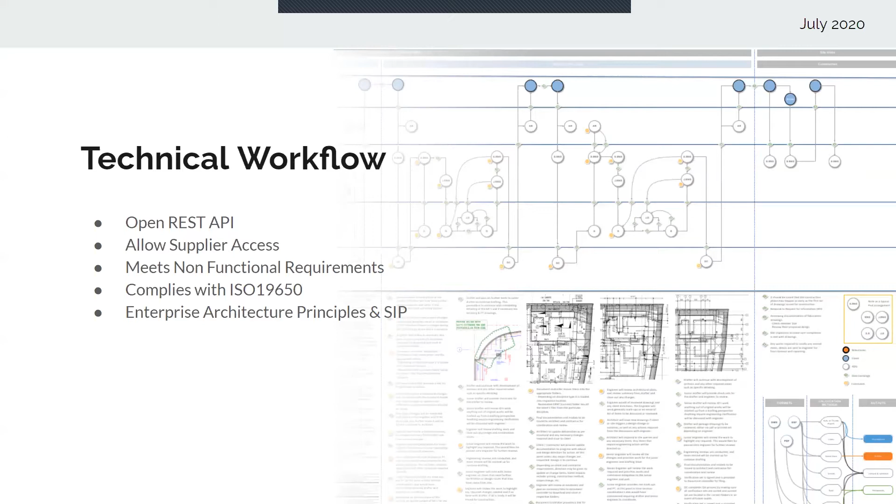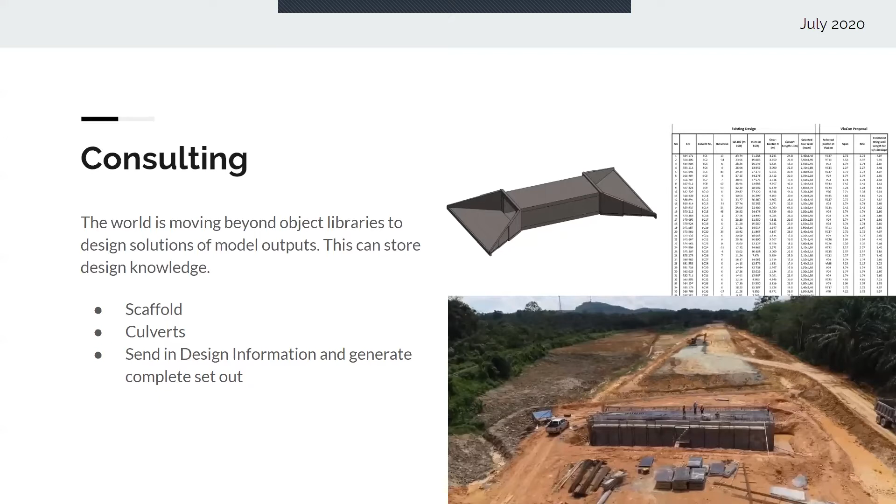The other one is, like I said, consulting work that we do, and this one was for the company YTL - basically a dual track electric train system from Johor all the way to Gemas. The track itself, as you see, is almost 200 kilometers with 11 stations, so that's our involvement in that project. What we've done specifically is help generate some digital assets - they manage a lot of the production of the culverts. I'm sure a lot of you have seen models dealt with in 3D, and there's always this perception that in the model it looks small, but in reality that's how big some of the culvert sizes are. And I'm sure in Vietnam, being a tropical location, you get the monsoon seasons where there's a lot of rain, a lot of weather, and so forth - so that's some of the work we've done.

Further to this is, how do we explore data from a city's perspective?

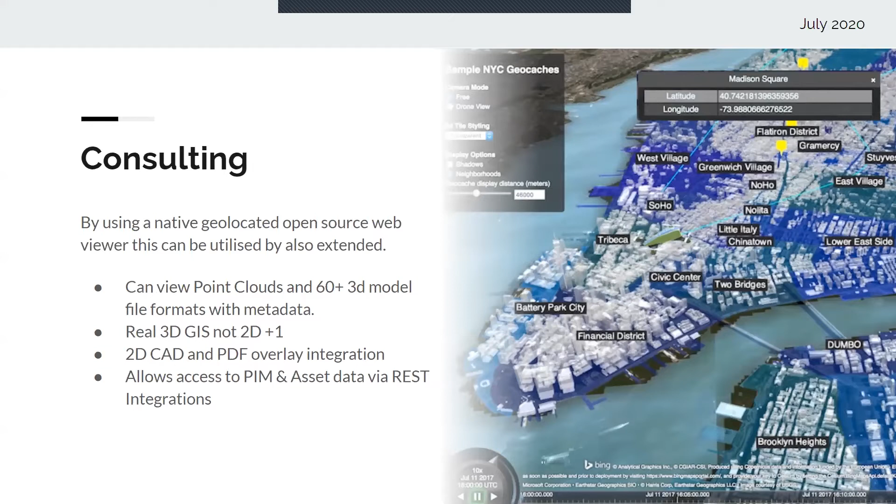We've seen a lot of interest lately on how state and local authorities within Australia are going to be able to better manage assets around the city. So we've been able to work in these spaces, helping with GIS information, civil CAD information, as well as BIM deliverables. There's a variety of information that gets incumbent into a department, similar to Vietnam, where various departments would need someone to manage these assets. We've helped explore those types of solutions.

The other part of the tools we develop is around data compliance. The good thing about Vietnam, and what the Ministry of Construction is doing now, is you're setting these policies at the moment, or may have already. You're asking for all these data requirements, but what I'd recommend is, if you're asking for digital information as a deliverable, think about what automation can be built into this. So if you're asking for classification, you can build audit tools that check a model and make sure these classifications have been entered into the necessary elements.

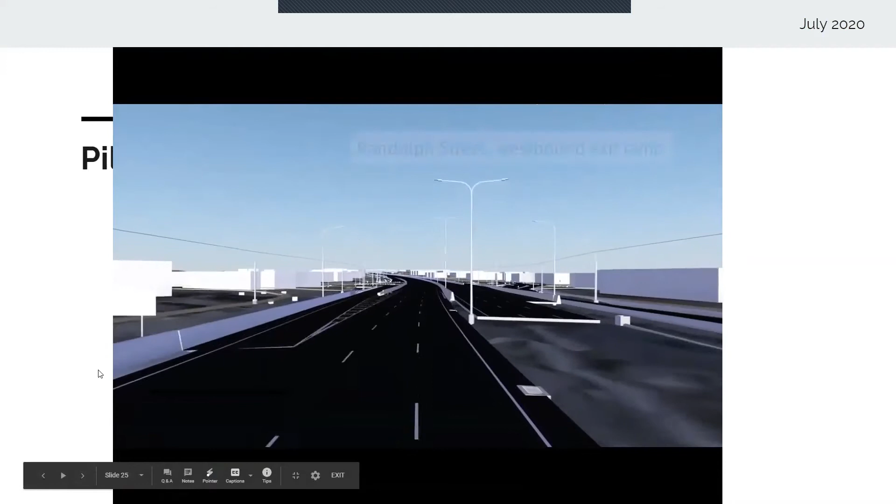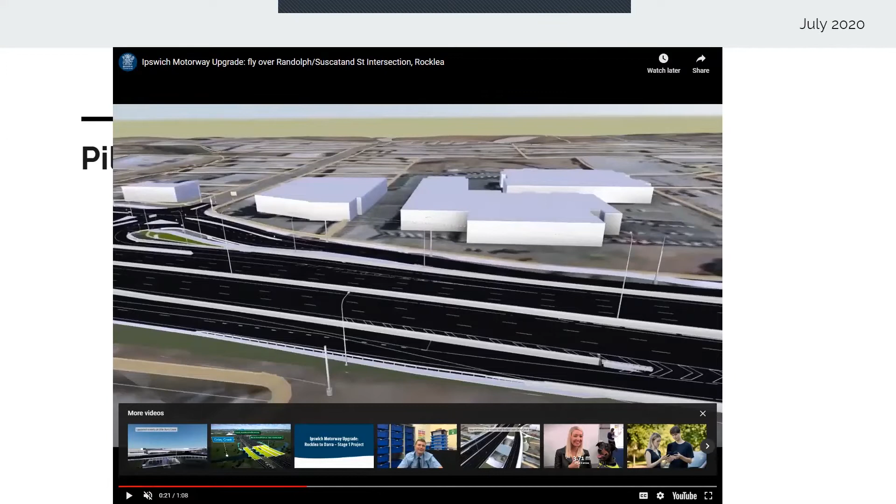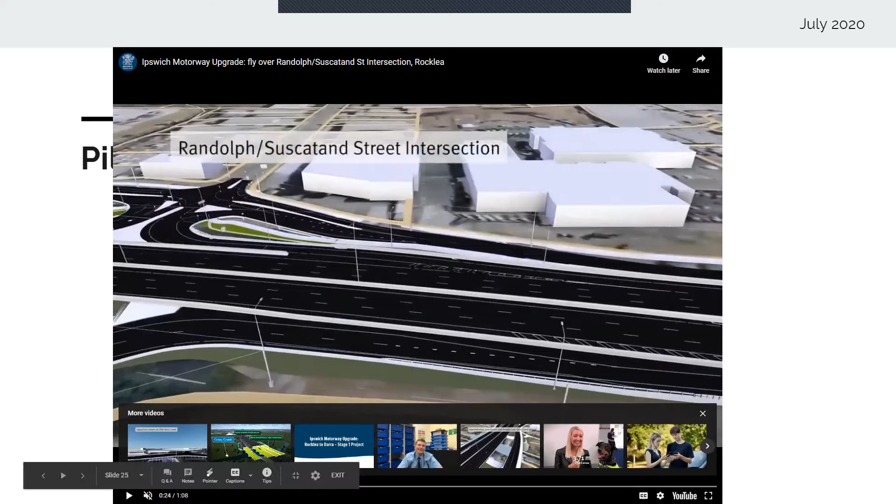So this is one of the case studies, project case studies here in Queensland. Department of Transport and Main Roads is effectively a department that manages all the roads, footpaths, and I guess all the accessible assets within Queensland. So if you remember looking at the map before, it's a pretty big land and zone. So even though we can see it's a nice, pretty model, essentially this project itself, as we walk through and look through it in detail, there's obviously a lot of existing facilities. This was an existing highway, and obviously upgrading an existing road takes a lot of planning.

So one of the goals that they did achieve with this was by having just a simple model, I suppose—and I wouldn't say simple, sorry—a model with enough attributes.

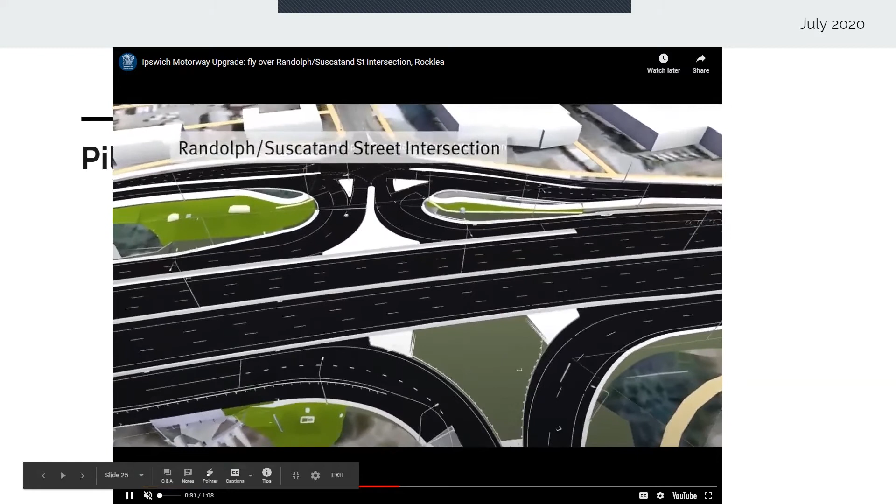You know, for instance, this is a barrier, that's a lighting pole, this is the road. Simple items like that, they're able to better plan how they're going to construct this, the staging, and really sit down with other stakeholders. So you imagine if we were going to construct this, how are we going to communicate to the businesses and say, well, hey, we're going to be building this for the next 2-3 years, or even more.

We're going to have this type of impact to your business, and have community consultation. So within Australia, I suppose in a lot of our projects, there is a lot of community feedback. If it's a state project, there is local authority feedback and so forth. If it's federal, there's state feedback and local feedback. So there's always definitely that collaborative approach to any capital works within Australia.

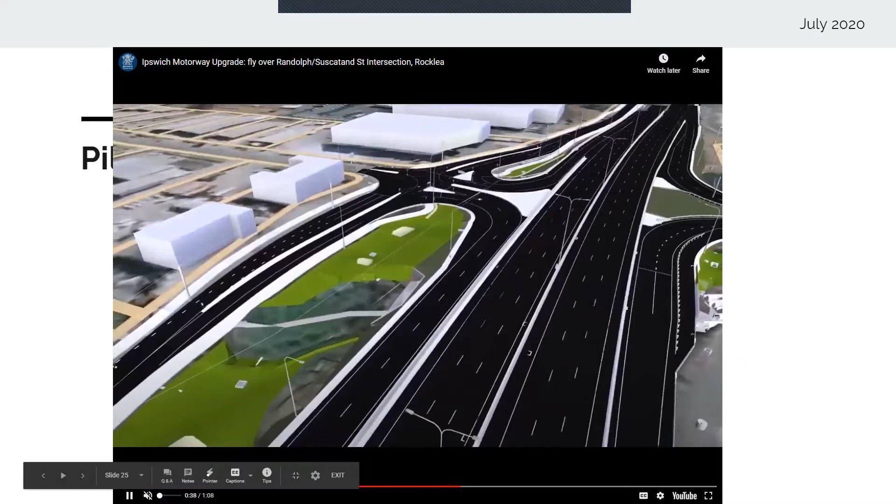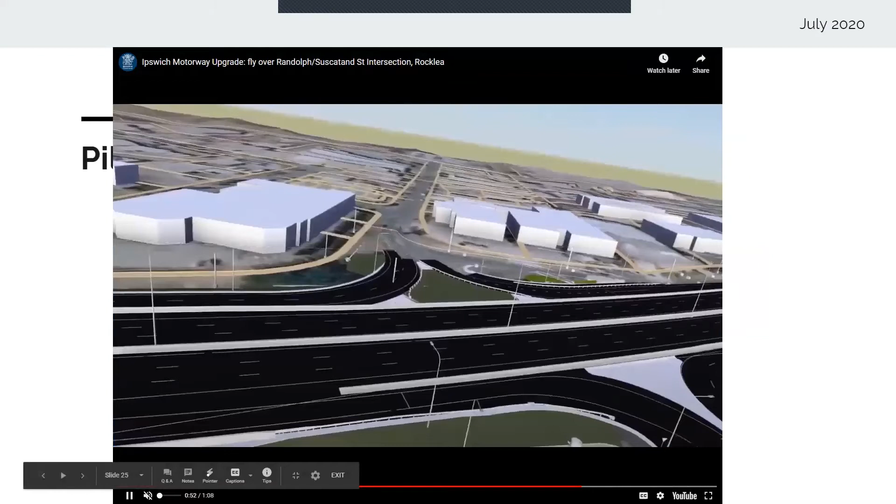And this is where a lot of, I guess, confusion and miscommunication happens on these type of projects when you can't see the full picture or the scale of it in the actual impact itself. So just keep playing that through.

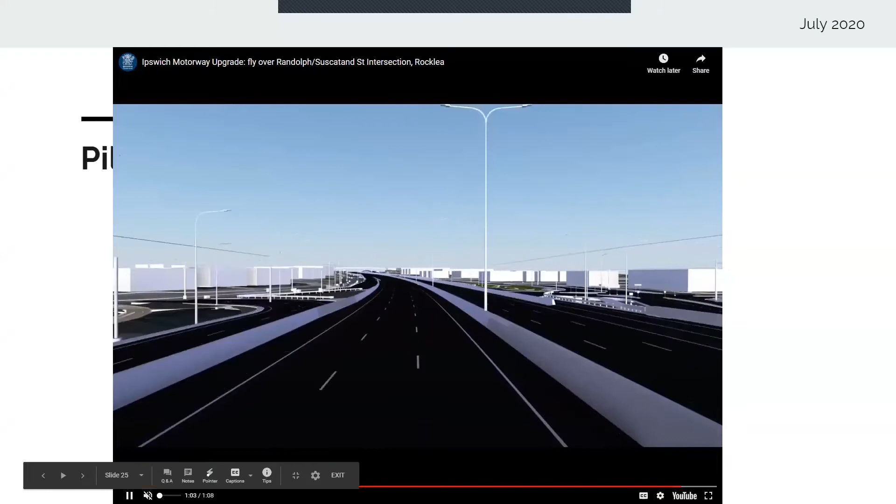The other one is, as part of this approach to BIM, this was deemed as a pilot project. So what that meant was it was one of the first projects that the department was looking at enforcing BIM as a deliverable or a way of delivering the project, but also a way to assess how much have we actually improved versus how much have we wasted in terms of time and effort. So that's what a pilot project is deemed between these departments.

So we saw the pretty picture of the renders, which is great, but ultimately drilling down to the construction and sequencing.

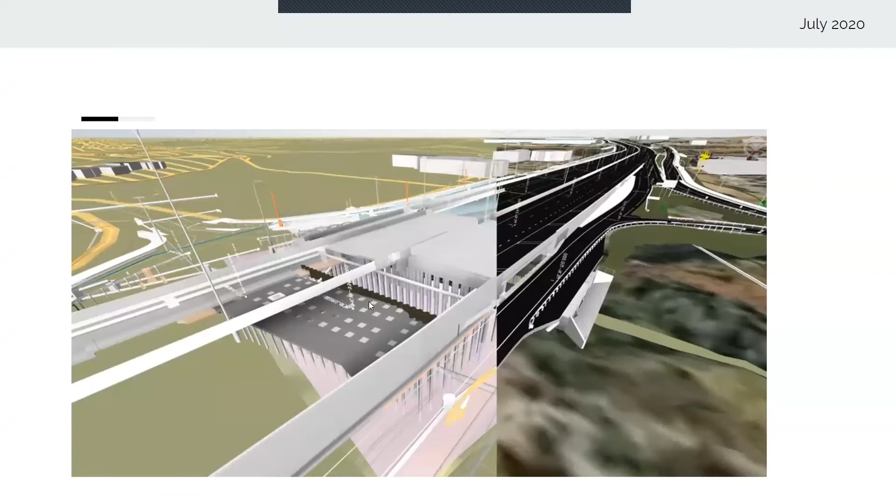In this case, it's very important that civil projects are managed effectively. If they're not, time is money, you know, so we all know time is money. And if there's any miscalculations and missed estimates, or even just purely missed tasks - so if we missed a critical task in the project, that adds time to the overall budget and so forth.

So having a digital representation of what's going to be built helps. And you can imagine if I was sitting here explaining to everyone how I'm going to build this, we can now have consultation, we can have feedback on how that's going to work. So that's one of the definitely outcomes of that particular project.

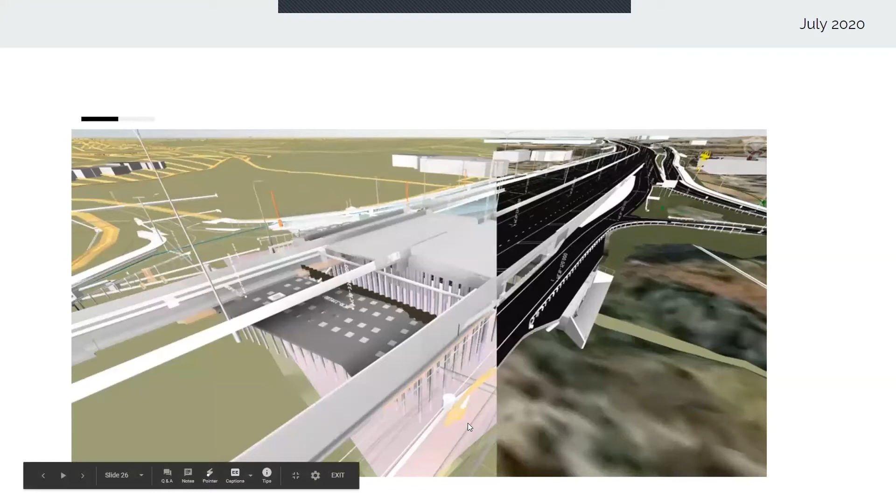So coming back to Queensland, their BIM approach has been very simple. It's not complex. Literally, this is their guideline. They have a 7-page document that talks about their departments internally. This is what we want to do, this is what we want to try to achieve.

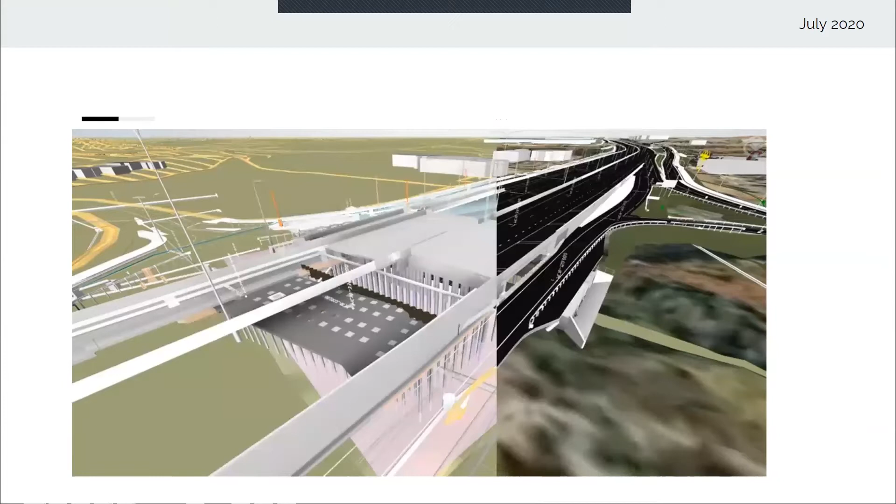Go ahead and look at some opportunities on doing that. So every department has gone down their own path on how to achieve that. So that's one thing I enjoyed about the Queensland approach - it's very simple in its form, but effective as well.

Now, heading towards Victoria now. So this is further down south. Similar to Queensland, all this information is available. You can definitely search it on Google if you guys have access. But if not, I've provided a link here as well. So further to that...

Victoria has approached this from an asset management perspective. So ultimately, in the end of the day, their goal in this approach was - we have a very large city with historical significance. We have different assets from light rails, roads, trams, tunnels, you name it, like any other city would.

And so how do we better manage this information? So that's where they talk about the term here called VDAS, because it's just VDAS, but what it means is the Victorian Digital Asset Strategy. Okay, I'm just going to skim this across up here.

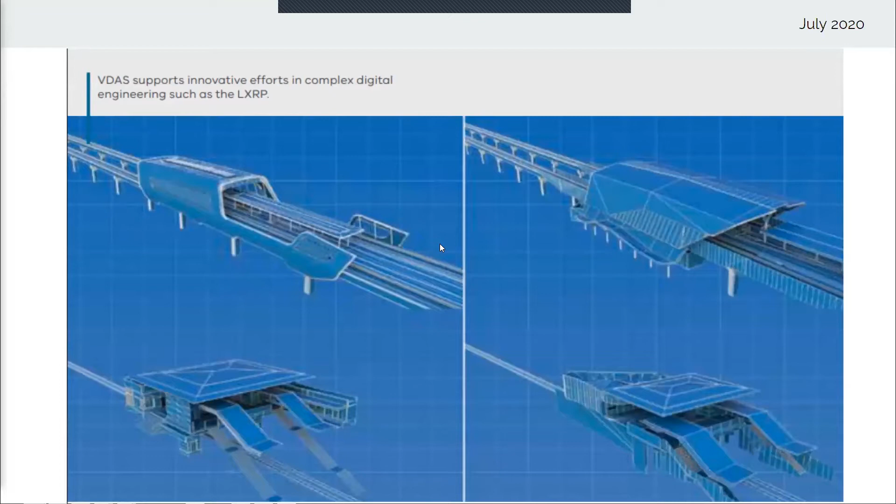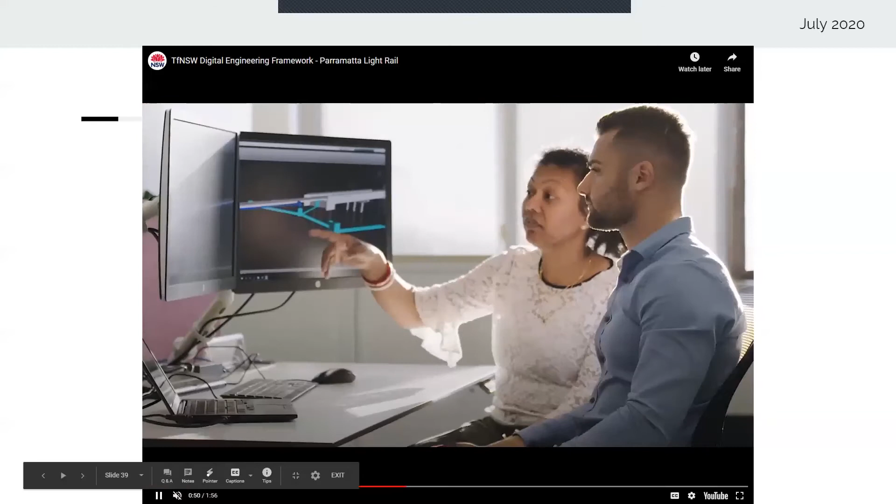So what they've done here for this particular department - Transport for New South Wales is, I guess, similar to Transport and Main Roads, TMR, in Queensland as well. So they manage roads and vehicular access. So what they've done here is developed a solution to capture information of where assets are located, and in this case, in-ground pipeworks, civils. So when they do any upgrades in the future, a way to reduce risk to the project is to provide this information to the contractor.

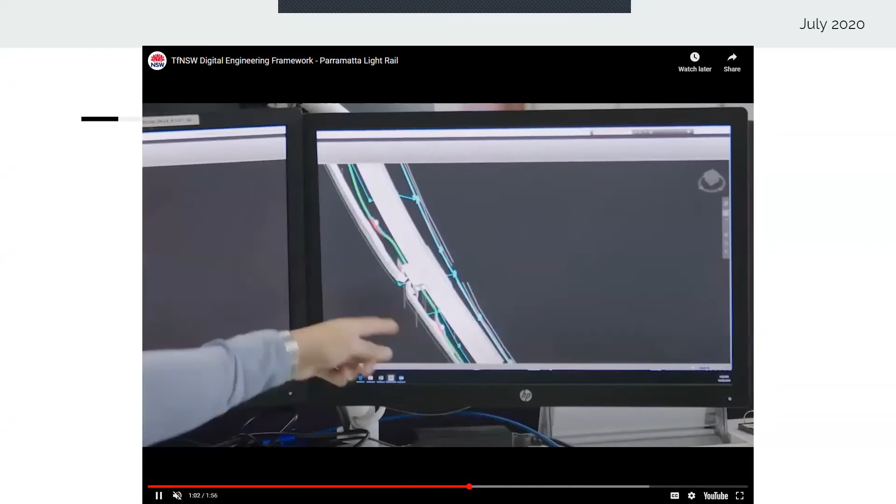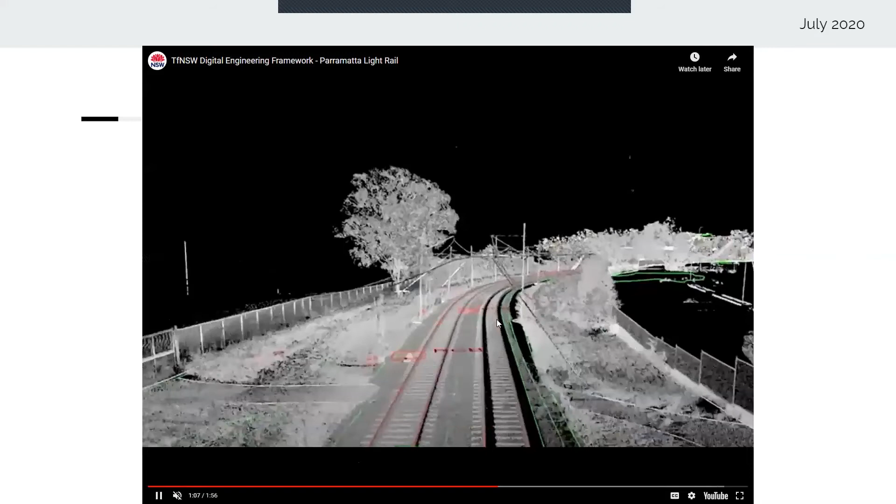So they can now say, hey contractor, here's all of our information where we know these are where the pipes are located and so forth. So this helps reduce risk from a contractor perspective, because if he knows that there's a pipe there and he's 90% sure the pipe is there versus 50% sure, that doesn't help. So there's a few things here: point cloud capturing, LiDAR, and so forth. But ultimately, they, or the contractor, when it gets into construction, want to know where this is located.

So basically, to sum up this situation here, what they've done is not produce a BIM model or anything. They've just looked internally within their business or organization to consider, well, how do we better manage the assets that we already have in ground? It's not always about the new construction, the new build. It's what we have now and how do we capture that information, which is a lot of cost.

So we're almost to a conclusion.

With New South Wales, as you saw there, their approach is vastly broader. They look at skills in the industry, ways of working differently, the technology, how this is going to affect procurement, costing of the project, and ultimately their vision of a digital twin, which is some type of digital representation of their asset. It doesn't have to be a model. It can be databases, data that shows the location, and vice versa.

Now, this is where I kind of wanted to talk to you guys about the classifications. Similar to Queensland, they've followed a Uniclass format, and I think it's probably good that you guys understand what the classification system is.

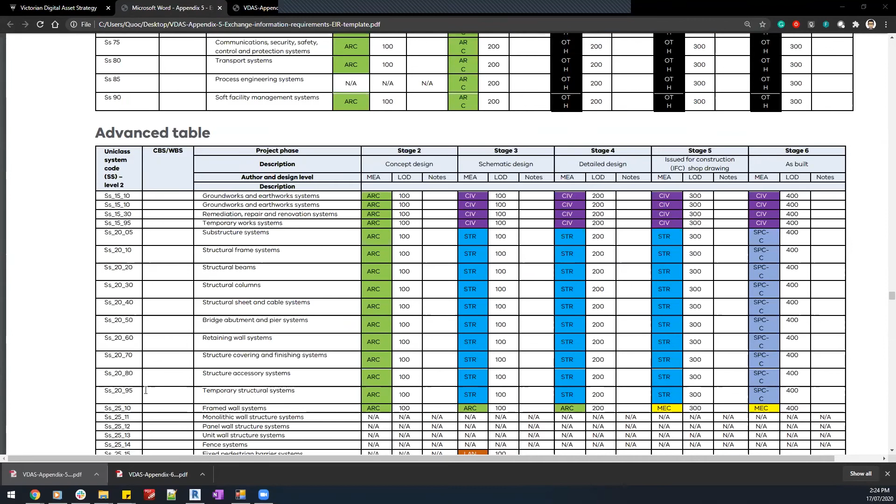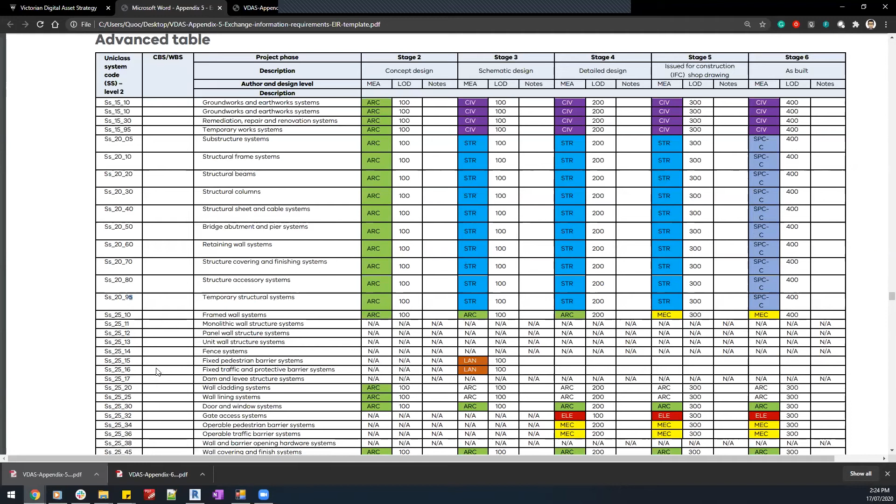Also, we can see that with the LOD table using Uniclass system code, it looks a little bit unfamiliar for us, I think, because we've been seeing that a lot with the uniformat table - like foundation and then substructure. Yeah, and ultimately, it just comes down to a preference really, and what system best works with you.

I personally think, and this is just my perspective, that a classification is a good start, whichever you use. But I think looking at the author, establishing a good relationship with them, so that in an event where you need to make some changes that work for you or your department, you want to know that they are able to help you there, and not just say 'well, no, this is how we do it and that's it,' because that locks you in their way of doing things and not your own.

I'm gonna see if we have a question on Slido. Yeah, sure. So we have one question that you know, like, can you? I'm gonna share my screen a little bit.

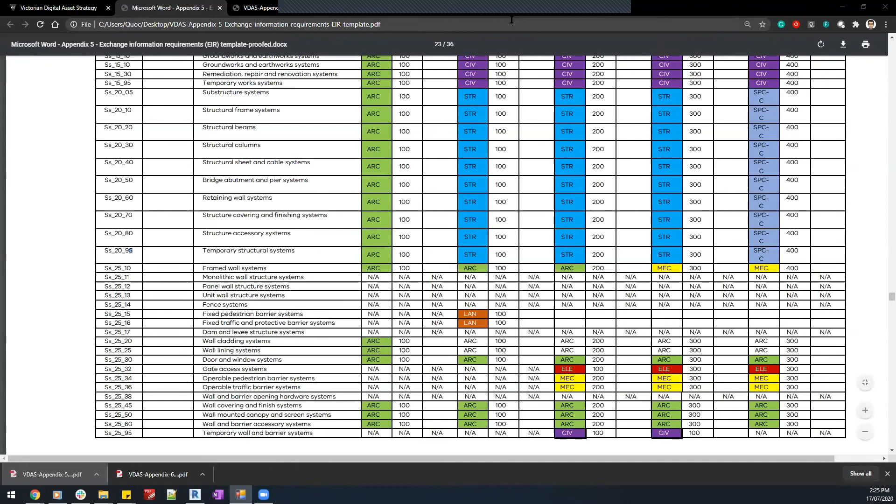So here you can see that we have a few questions. So Cuong, about the template for OIR and other templates, we can have that on the website. So I'm gonna recap that real quick.